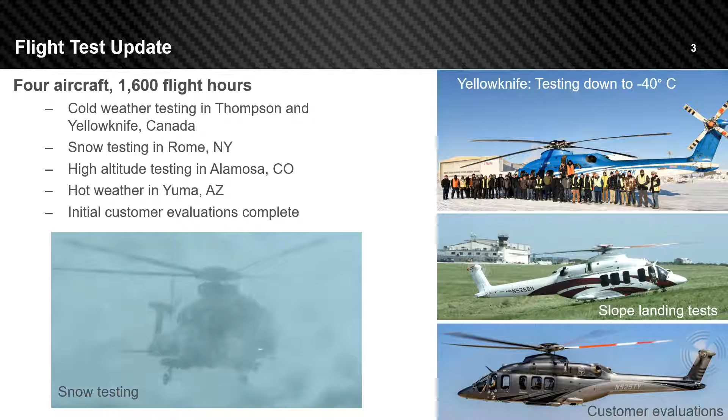I came on board shortly after the aircraft started flying, which was in 2016, and those aircraft have pretty much borne the brunt of the testing to date, including testing here in North Texas. We've also gone all over Canada, up to Thompson and Yellowknife in 2017 and 2018 to conduct cold weather testing. We needed to get as close to minus 40 degrees C or Fahrenheit—they cross over at the same point when it gets that cold. It's been interesting doing some stuff up there.

If anyone has time, there's a YouTube channel—I think it's run by the same guy that does Ice Pilots—that has footage of us doing some of our lower speed and handling qualities testing up there in Yellowknife. Simultaneously, we sent aircraft 14 to Rome, New York to do snow testing, on the eastern side of the Great Lakes, to take advantage of lake effect snow and the extreme weather to get our snow certification data, in a report format we've presented to the FAA. We're waiting for acceptance, or for them to tell us we need to redo some of that testing.

Two years ago, we simultaneously had aircraft in Yuma, Arizona, and Alamosa, Colorado, to do high altitude and hot weather testing. I got a chance to take part in both of those test programs, with a team of about 30 to 35 people at each site to help pull that off. It was an interesting time to go to those 2 locations to check out how the aircraft performs at the upper or outer edges of the performance envelope we expect.

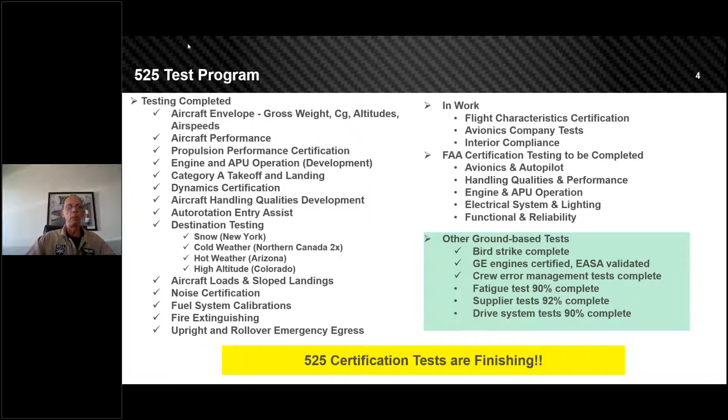Okay, this one was labeled performance in the program - I changed the features just because I thought it was a little bit more appropriate to the content that is going to follow from here. This is going to sound a little bit like marketing, but it's kind of unique in some respects to what somebody will see out there in the fleet.

Probably the biggest one that we've got going on is the triple redundant fly-by-wire flight controls. That's, like I said, unique. There are other aircraft out there, rotorcraft, that have fly-by-wire flight control systems, but none that have been put forward for civilian certification. When tilt rotors came around - Bell's been doing fly-by-wire for 30 plus years.

When you start talking about anything that's got a tilt rotor type of thing, V22, XV15 was mechanical, but AW609, which was a joint Agusta-Westland, now Leonardo Bell program, until we sold our shares, that was all fly-by-wire. So we've been doing this for a while, but it's the first time it's been applied to a civilian helicopter. A couple of the military helicopters have fly-by-wire.

CH-148, the Sikorsky built for the Canadians, that one's probably the most well-known. And then Sikorsky also had a foray for the Army to take a look at conceptually what a Black Hawk might look like should it have fly-by-wire flight controls. We'll talk a little bit about how Bell's philosophy differs maybe slightly from other manufacturers. In addition, the newest one out there is CH-53K, fully fly-by-wire, another Sikorsky product.

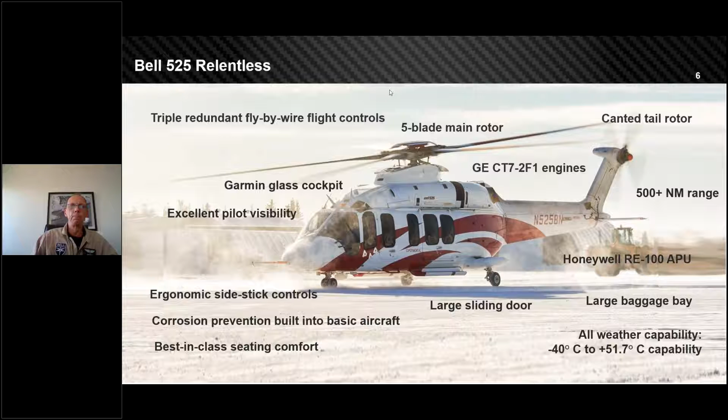Okay, got to move my picture around. Okay, so this could be a question or a statement. This one's really a statement.

So when we talk to people about the 525 and what makes it not necessarily different, not necessarily better, but just some of the lessons learned over the past that we hope translates into something better, this is the list we came up with. You've got to get people places, and they've got to be able to get off safely, not injured, not hurt. Got to get there. So we took a look at that and said, okay, from the crew and passenger standpoint, these are the things the aircraft needs to have. It needs to be reliable.

It needs to be functional. It needs to be something they can get into, like I said before. And if something does happen, that we've got enough redundancy and backup systems that either the aircraft can continue to its destination, or it can divert to someplace that's safe to do so, and then deal with the issue from there. And if those opportunities don't present themselves, that you can safely land the aircraft, shut the aircraft down and get the people out safely. So those are probably the basic tenets we use to design the aircraft.

But we didn't just forget about the other folks that are part of this puzzle that keeps the aircraft reliable. We have to make sure it's maintainable as well.

And if you take a look at this aircraft, it's a tall aircraft. So when you've got height and people working on stuff, you got to make sure that it's not slippery. So we've got non-skid on the top of the aircraft. You got to give them a work platform to work from. So if you take a look at the hydraulic access panels, they fold down and they're work platforms. So if you don't have stands available, these guys can get up there, they can open the cowling, and they can stand on there and work on the aircraft and not worry about slipping and falling off.

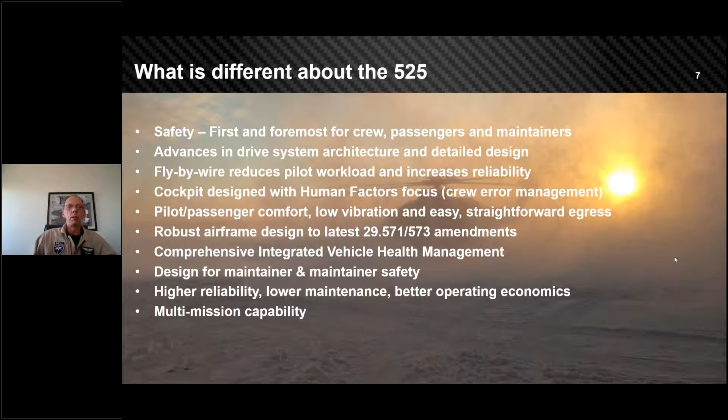When we did the egress test I was involved with, the guys on the outside, unbeknownst to us, kept those doors shut, so we'd be forced to push the windows out - and we still did that using these push-out windows in the 19 seconds that I described.

There's also J-tracks up here for the pilots, so you can release a handle on the outside edge of the seat, and the seats for the pilots will rotate aft, slide aft and then rotate, making egress a little easier. I'm used to just climbing in and out of the seats, and most of the guys who have been on the program a while just climb out, but in the event, I think operators will probably end up using the J-tracks instead.

Super wide cabin, 84 inches, and each of these seats is 20 inches wide - so plenty of space for people to sit and stretch out.

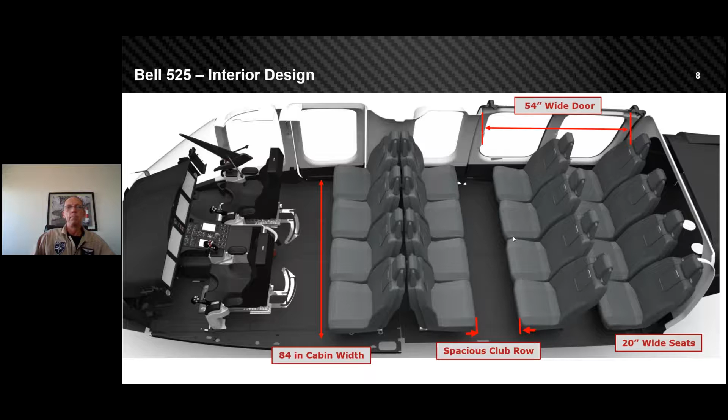Okay, then up front, we've incorporated Garmin G5000H. What's notable about this is there are two pilot or primary flight displays and two multifunction displays, each with a reversionary mode - so if you lose a PFD, the MFD becomes the PFD, or vice versa. A lot of work has gone into making sure we've got redundancy and backups should a screen fail. Everything is controlled through the Garmin touch controllers, which is where you see the pilot's finger pointing, so everything is accessible through there.

What's notable about this picture, and probably not apparent to everyone, is that usually in a cockpit, especially legacy aircraft, you'll see switches and everything in the overhead. There are no switches in the overhead in the 525 - the only control up there is a rotor brake. So everything is clean inside, uncluttered and controlled. This lower panel is for the flight director, a Garmin feature as well, and then all the engine controls are up here.

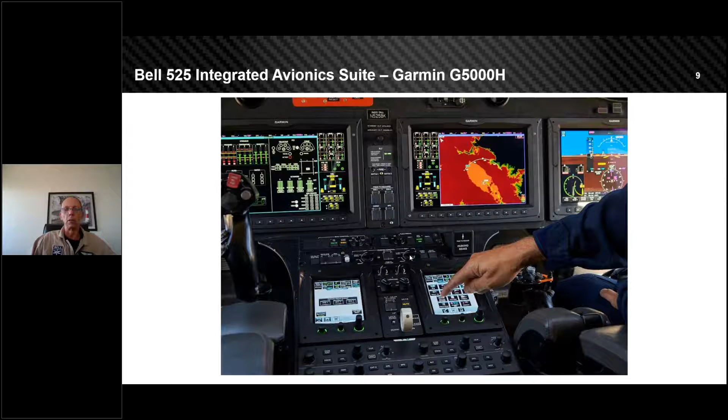Super simple. I know I'm running a little behind schedule here, so I'll try to speed it up.

Talking about the fly-by-wire - why fly-by-wire? It seems like we've made the choice whereas other manufacturers haven't. Where we see the primary benefit is the improvement in safety that we believe fly-by-wire provides. We can do a lot with it that you just can't do, or is very difficult to do, with conventionally controlled bell cranks, push tubes, cables, types of systems.

We've got 3 flight control computers, each with its own 2 independent processors. Any one of the systems is fully capable of flying the aircraft should we have failures. In addition to our primary power generation in terms of electrical power, each flight control computer has a permanent magnetic generator - so if we lose all 3 generators, there's still a PMG that provides power to the flight control computers.

So if the rotor's turning, those things are powered. We'll see another picture here where we've taken advantage of the room that the aircraft provides and moved the systems around so that no critical systems are in the same zone. So if we take a bird strike or something happens, unforeseen, within an area of an aircraft, it doesn't take out any other systems.

And as part of being a fly-by-wire system, we've gotten rid of this vast array of complex mechanical linkages and the associated maintenance that goes with those, and just replaced them with wires. So there's one area where we do have mechanical linkages, and we'll talk about why in a second. But those are the primary reasons that we went fly-by-wire.

And we've gone through failure mode testing and all that kind of stuff to make sure that this isn't just talk, that it actually functions in real life. One of the systems that we use we call the RASIL, the Relentless Advanced Systems Integration Lab. It's actually hooked up to aircraft hydraulic power packs, aircraft flight control actuators, aircraft flight control computers. So anything that we do in the cockpit portion of the simulator gets translated into real live flight control actuator input. We can measure actual loads and determine if we've got issues and what we might need to do to fix those. That's one of the benefits of simulation technology where it is today, where it might not have been available 30 years ago.

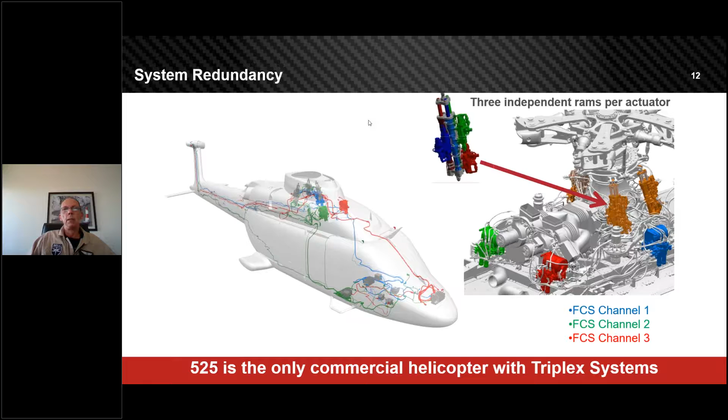Trying to determine, was that actually a vibration that caused the collective to move, or was it a pilot input that caused it to move? This simplifies that level of calculation. Same thing with the cyclic and the pedals. So it's a very simple run. If you look up the floorboards and take a look in there, it's, to me, from a design philosophy standpoint, a smart way to go. Everybody knows what everybody else is doing, and the trade-offs with that, I think, are far outweighed by the benefits.

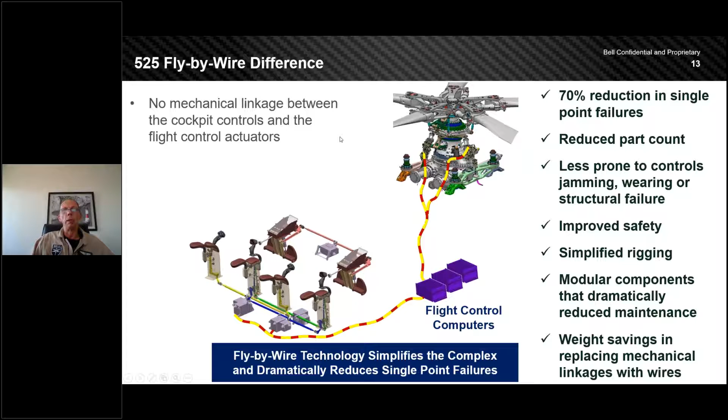Okay, let's see, single axis inputs. So anytime you've got a high tail rotor, like we have on the 525, or other helicopters, or a canted tail rotor, basically two of those taking place, you get control coupling. So with a high tail rotor, if you pull up on the collective, you're going to get some lift, which causes a pitch implication, and you can go through all these different iterations. We're able to take care of that control coupling, that the pilot would normally have to take care of, through software.

And it makes it a very easy helicopter to fly. You get a person in there and they don't have any time in the aircraft, and they're able to fly it right away, to a very high degree of fidelity. That kind of thing takes a lot of, in a mechanically controlled aircraft, a very engineering intensive exercise to try to get rid of.

Once again, we've got full-time continuous stabilization for gusts and other disturbances. We talked about the control axis decoupling, primarily as a result of high tail rotor and canted tail rotor, and then any other coupling that might exist, whether it's collective cyclic or pedal induced. Full-time 4-axis autopilot in all axes.

We've also got advanced modes that lay on top of that for flight director. So we've got altitude hold, and the ability to couple to approaches for navigation, whether it's VOR, GPS, whatever the basis might be. Heading hold, the whole nine yards, depending on how you're being vectored around airspace or told to navigate to a destination.

The aircraft will return to trim. So if the pilot decides to push the cyclic out of the detent position to override something, it will return back to that reference, especially in fore and aft cyclic. It will do it in roll to a certain degree. Once you get outside a certain displacement laterally, the aircraft will say, okay, you want to maintain a certain angle of bank, it'll automatically do that, and maintain it throughout until the aircraft runs out of fuel.

We already talked about position hold, but it's GPS based. You can also bring in the flight director altitude hold, and it'll hold the aircraft in position at set altitude until the fuel runs out.

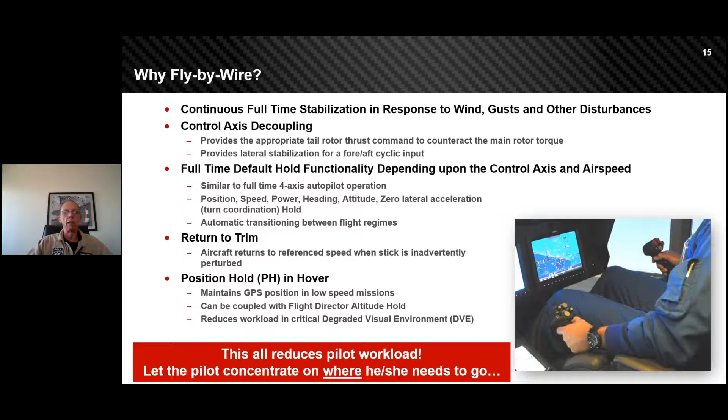Okay, some of the other things here, I'm not going to go through all of them, but as with all aircraft anymore, we've got ADS-B in and out. Along with that, we've got weather and traffic, which is a real big help around here, especially in the Dallas-Fort Worth area. We've got the country's busiest airport, in addition to all the general aviation traffic that takes place out of this area.

We've got terrain awareness that comes in handy, and that's everything from the Earth itself, and then all the stuff that we put on as human beings, whether that's towers or windmills or anything that sticks up out of the ground that we might hit.

We already talked about other things as far as the rotor is concerned. We've got cameras on the aircraft, so we can take a look at the tail rotor from one of the MFDs. We can take a look in the baggage bay to make sure everything is right within the baggage bay, whether that's fire or load shifting, all that kind of stuff that an operator is going to care about.

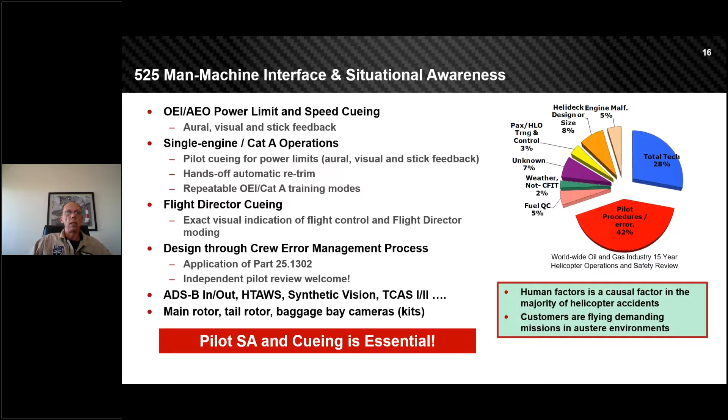So we've got two types of augmentation. It's always fly-by-wire, but we've got an AUG-on mode and an AUG-off mode. We normally fly in the AUG-on mode, which gives us all the higher level functions that I already talked about, turn coordination, heading hold, et cetera, et cetera.

We can also back off one mode and take away those upper level functions, going AUG-off. We're still fly-by-wire, but in AUG-off, it's amazing to fly this aircraft. People get kind of freaked out when they hear about degraded mode, but it's transparent going from AUG-on to AUG-off. You have to work your feet a little bit more just to make sure you maintain the trim ball in the center, but that's about it.

Then we've got design assurance level A for all of the electric systems. Don't want to get into that.

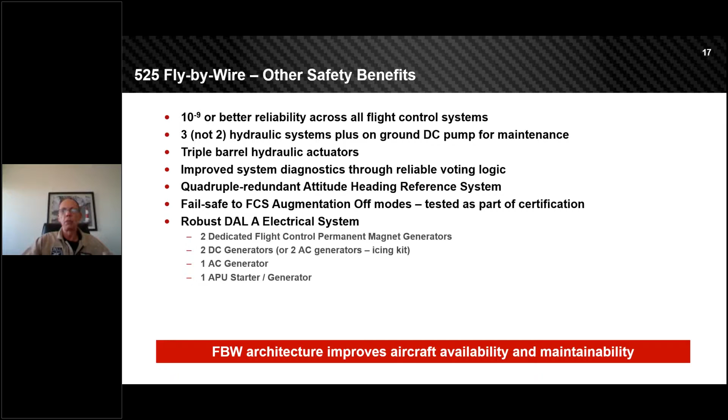Okay, so I talked about some of our customer evaluations. This is some of the stuff that we've heard back from the customers. They say it's a dream to fly.

That's kind of what we expected based on our experience, but it's nice to hear that from other people, that we're not just biased in our opinion of aircraft. They think that this is a huge step forward in terms of where the rotorcraft helicopter industry is today compared to where the 525 is taking it.

They've also said, from a Part 29 certification standpoint, the 525 is how all aircraft should fly. It's incredibly smooth. You don't know how fast you're going unless you actually take a look at the instruments. It's kind of like driving a really high-end car that's well insulated and smooth, and you look down and you're doing 90, and you thought you were doing 50. It's the same kind of thing here.

The pilot cueing in terms of the flight controls is extremely helpful. It helps keep the pilot's eyes outside, which is what we want. We want the pilots looking outside, paying attention to the world, and not having to just maintain that basic aviating part of it that we talked about.

Plenty of power, once again that's your guys' engine, at least the GE people on board. Auto rotation assistance is a game changer. Anybody that flies helicopters knows that for airplanes, airspeed is life. Well, for us, rotor RPM is life, especially in the event of an engine failure. The fact that the aircraft will take care of that initial reaction for you, trim you back to that best rate of descent airspeed and keep the NR where it needs to be, it's huge.